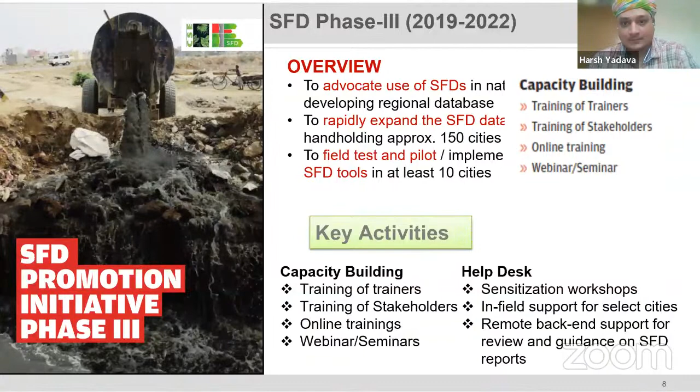How it has helped us, let me explain. When we made an SFD of Delhi, it helped us understand that 30% of the city is dependent on on-site sanitation systems. The report helped enlighten the National Green Tribunal Committee (NGT) to form a committee on pollution of River Yamuna. The findings of SFD 2016 helped register more than 300 private desludgers and initiate the practice of co-treatment—treating fecal sludge and septage along with municipal sewage in STPs—and the free installation of septic tanks.

A few learnings I want to share: when we were developing SFDs, we practiced and tested them in the field, brought back feedback, and used that to help improve it as a tool.

We understood that in India there is a lot of non-availability of data. Data is not current, it's outdated, and limited in form. There are areas where sewer lines are present but STPs are not, or STPs are present but household connections aren't there, or the STP exists but all wastewater is coming through open drains or tapping of open drains.

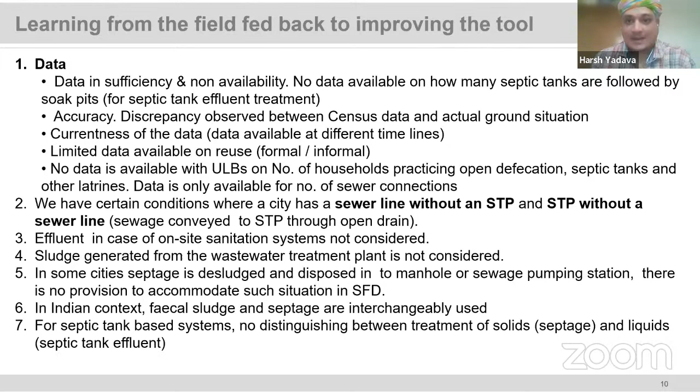Effluent from septic tanks is never measured. Reuse of sludge and data on what happens to fecal sludge was not available. In the Indian context, fecal sludge and septage were used interchangeably, so the precise meaning of these terms was not clear. These were findings from the ground when we field-tested SFDs, and we gave feedback to the SFD group which helped improve the tool further.

That was one part where we applied SFD as a tool to bring information from the ground. The other part is how we applied SFD for advocacy. For example, in Delhi, when we made the SFD it showed 56% safely managed, but we also made SFDs of smaller areas—lower income settlements, slum areas like the JJ resettlement colonies popularly known as Savda and Ayanagar. These are isolated areas in Delhi. Comparing Delhi's SFD to these areas, we can see the difference and how there has been inequality in services.

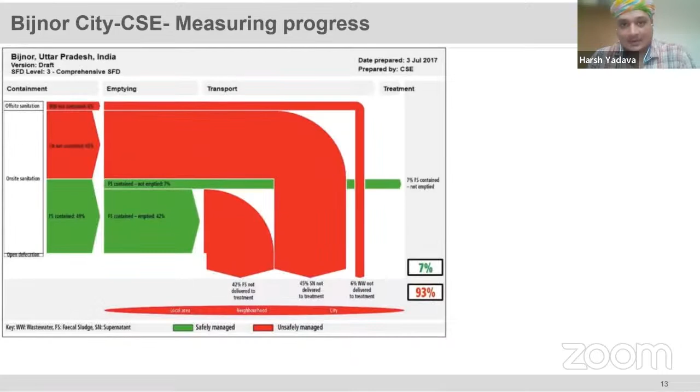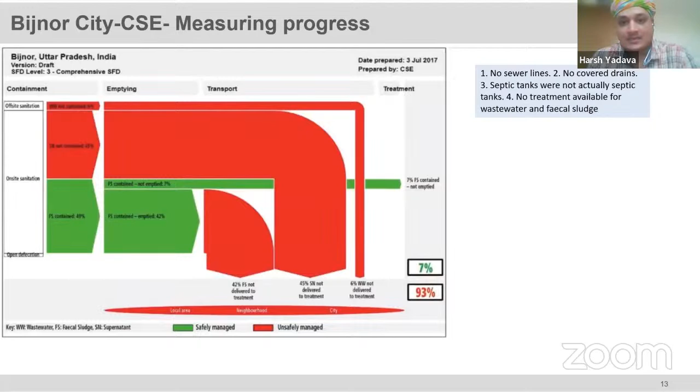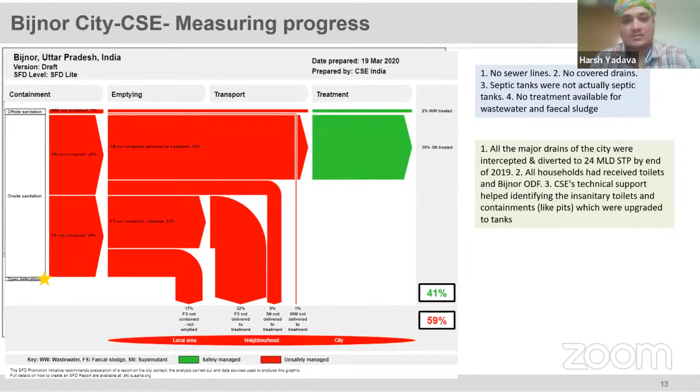We also used SFD in measuring progress. For example, in Bijnor, when there were no sewer lines or septic tanks, the city was only able to manage 7% of excreta and wastewater safely. When sewer lines were introduced, we saw some change. Then when the co-treatment practice was implemented in the city, we saw even more change.

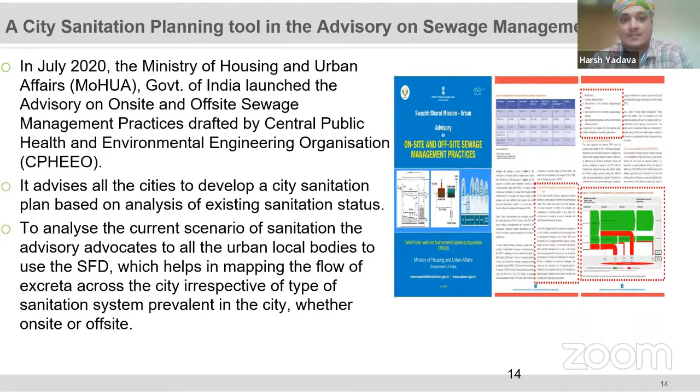A great achievement for CSE as a partner in SFD is that we were able to push this agenda into the manual—the advisory on on-site and off-site sewage management practices—drafted by the Central Public Health and Environmental Engineering Organization in 2020.

Before we move to further presentations, I'd like participants to ponder on a few things. SFD will not tell you the technologies, nor will it tell you the cost the town would incur, but it will always help you prioritize where to focus. Just making an SFD is not enough—it should be followed by plans and interventions for maximum utilization as a tool. How can it be combined with other tools like CSDA and energy assessment tools? And when making an SFD, what is your purpose—do you want to understand a change in the sanitation scenario, the effectiveness of sanitation service delivery, or to determine priorities? This should be clear before making an SFD.

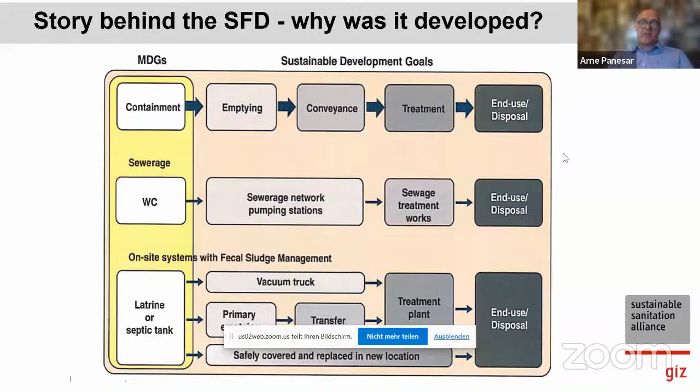I was thinking this is really a great tool. Together with a group, we started to say, can we promote that, and really make it not just an idea but a proper tool that can be used across the globe? We said yeah, let's do that. The inventors and the group said we'll do it with whatever we can. Then the Gates Foundation approached us and offered to be part of that journey.

Yeah, and so since then we're going on. What were the tasks to create a uniform, reliable way to look at sanitation that can be done in a similar way across the globe, to bring this methodology into one place?

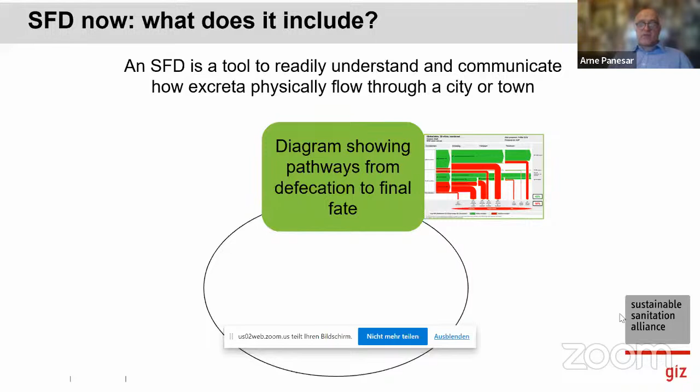But it's not only the diagram, it's also the narrative report on service and outcomes, which has to be there. For example, there might be a large city that received donor funds or its own net investment and built a huge central treatment plant, but they did not have the capacity to run it or replace broken parts, so it was not going — failing to function soon. That should be in the narrative report: first you have to have the capacity to run such systems, or the enabling environment, so you don't just look at the diagram and think, let's just build something and all problems are gone.

So the narrative report has to look into the context — what is the existing enabling environment — and help you not to take too fast and too simple conclusions from the diagram.

Then we're in an area where often there's no data, because if we look into informal settlements, if something isn't even planned or allowed to be there, how can you have data on it? So we said where we don't have data, we'll have informed interviews and do estimates, but be very transparent on how we came to the data we present. A complete record of all data sources is the third element of an SFD. With this, we could go into areas where others never have been, because they said, oh, we don't have data. We said no, for the initial picture we can get enough understanding of the situation and put it into a picture that is easy to understand.

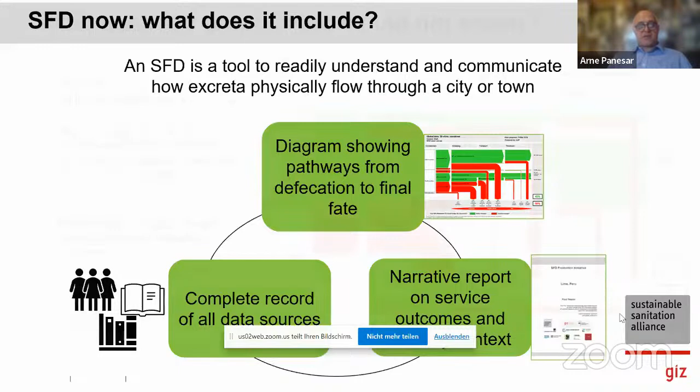So here we say SFDs are based on credible data, but not always on accurate data.

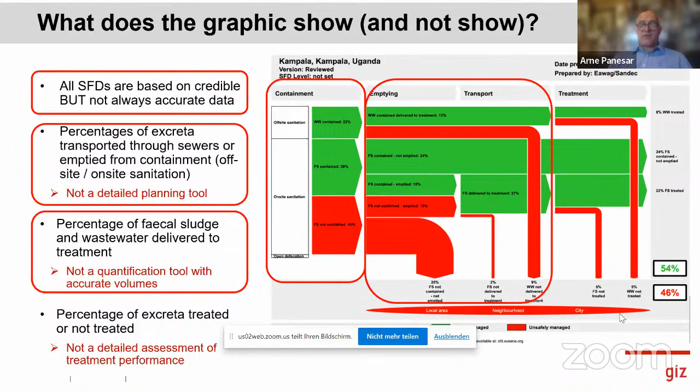It's starting with containment. As Harsh already said, it's the percentage of excreta - it's not a detailed planning tool. It's going along the chain: it's the percentage of fecal sludge and wastewater delivered to treatment, and it's not a quantified tool. It's not looking into volumes, but into the percentage of excreta and where it lands up, and it's as well looking into the percentage treated or not treated. It's not a detailed assessment of treatment performance. So it's doing some of the things and not all of the things, but it's a wonderful starting point.

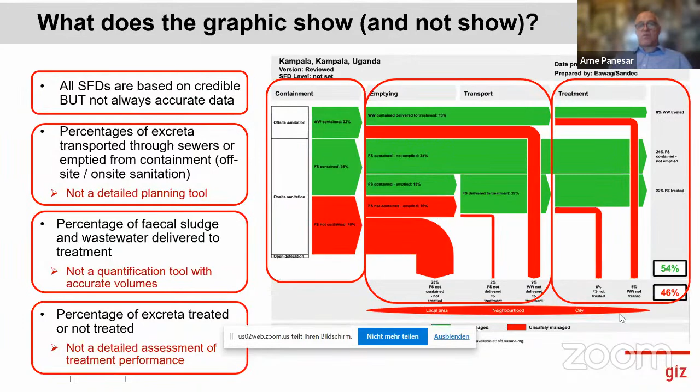As such, it helped bring the topic into discussion, not only in Delhi, as Harsh pointed out, but as well in Kenya. It came into the newspaper. You were wonderful as well at CSE to put it into the Down to Earth journal when Bill Gates was meeting the Prime Minister - he actually spent half an hour on an SFD that was produced from the initiative, and it helped enlarge the focus of the Swachh Bharat campaign, not only on containment, on the toilet, but looking into the full picture.

And we had then this plus and plus plus, which as well brought more sustainability into the whole campaign. Now it's one of the better used reference tools in the sector. We have at the moment around 250 cities covered, with about 180 million people, and it's presented not only by us but by different actors who find it good to explain their situation and what they want to do in presentations and so on. So it's actually contributing to the sector and to progress around that.

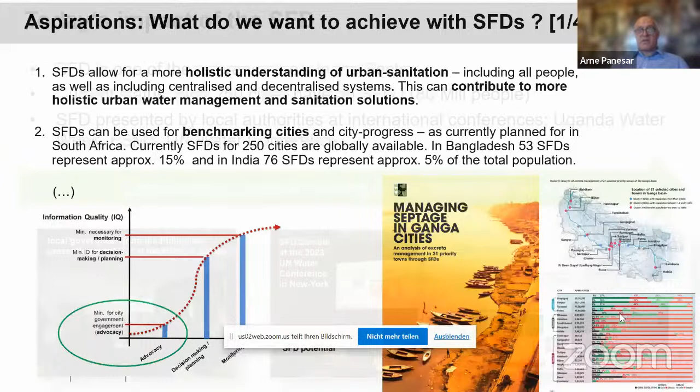An example is again the publication from CSE. So SFDs allow us for a more holistic understanding of urban sanitation, including all people, as well as centralized and decentralized systems. This can contribute to more holistic urban water management and sanitation solutions. And with that, it can as well be used for an initial benchmarking, e.g. between cities, like they're planning to do in South Africa, or in other countries, if you have a high number of SFDs, this process will sort of start on its own.

That's something else we've done on the website - we've provided a dashboard where with a few clicks, these are data from, I think, last week when I looked into them. You can have a comparison of all 53 SFDs from Bangladesh, for example, which already represent 24 million from roughly 160 million people - that's going towards 15% of the whole population, and even more of the urban population. Again, you can depict them as a multi-city diagram and get an idea where we're standing, and whether we have some progress.

Similarly, there are 76 cities from India in the database, representing just around 70 million people - that's 5% of the total population of India. But it's India, so it's a large population, and again it gives you some hints on the broader picture.

And like this, SFDs can be used to visualize and communicate progress. That can be done on a country level. Here we have an example from Zambia - similar to Delhi, they've looked into the whole city, but they've also looked into project areas.

What they've done is say, okay, we are planning for an investment - what will be the outcome of the investment? And if we invest it like this, what will be the outcome? And if we invest it in another way, what will be the different outcome? The SFD is a very convenient tool to show that in a very easy to understand way, so you can design scenarios and plan for your investment.

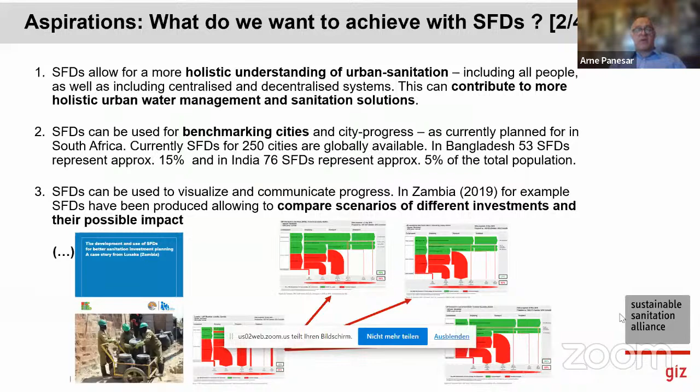Actually, in the beginning we said the effort to do an SFD typically should be made if there's a city where an investment is coming, and where you want to make sure that investment is reaching the unserved, and not just improving the situation for those who already are in a slightly better position.

Recently, we had a publication from Kampala where greenhouse gas emissions and sanitation were brought together, and the SFD was used to visualize where greenhouse gas emissions are actually happening. Yes, they're happening in the treatment plant, because you have to pump and bring in oxygen and so on, but mainly they're happening in septic tanks, where the organic matter is transformed into greenhouse gases.

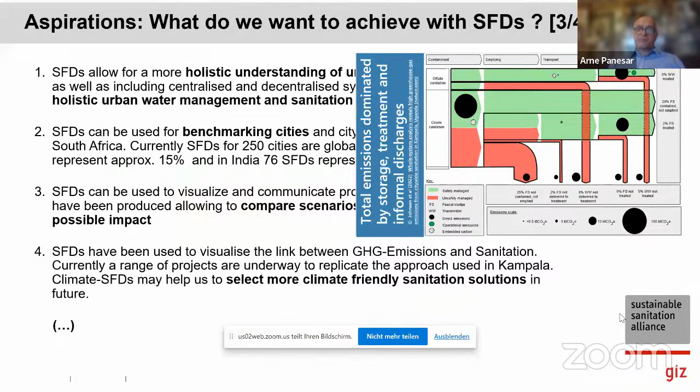The solution would be more scheduled emptying of septic tanks so that you can bring the material to a treatment plant and then use the biogas or do something else with it. So that's an ongoing discussion, and we need more publications because that's just a very initial one. Some are financed again by the foundation, and I'm curious what we learn from them and how this will lead.

We as well had a similar point from Harsh already. I'm pointing at the sanitation journey where we have collected a range of tools and concepts. SFD is one of them. It gives you the baseline information. If you want to understand the key issues, why actually is the situation as it is, we have the city service delivery assessment, and all that can be the foundation to then create good city sanitation plans. WHO has sort of done sanitation safety planning that as well builds on an SFD, and like this you can have a more complete picture of sanitation.

But I want to underline that in India we actually already have a very good urban sanitation strategy program and mechanism, and you have to think twice where to add additional efforts to visualize things or to have better information. And last not least, SFDs always put a focus on those remaining with unsafe managed sanitation, and thereby they help focusing on those people, and they help us to leave no one behind. And I think that's a key aim that we have when we work in the area of sanitation.

Good morning or afternoon, everyone, and thank you, CSE, for the invitation. My name is Alexandra Dubois, and I work for GIZ as well as SuSanA, the Sustainable Sanitation Alliance. Today I will be presenting about the potential application of SFD.

For that, I will use concrete examples that I have selected from the GIZ project portfolio. My presentation is actually going to echo more or less the presentation of Harsh and Arne, in the sense that I'm going to go a little bit deeper into the topic of usage of SFD.

I've compiled here in this slide a list of potential applications for the SFD. Among others, SFD can be used as an awareness raising tool. It can be used also for advocacy, coordinated dialogue, urban planning decisions, informing investment, monitoring, and last but not least, sector policies.

This is the structure of my presentation. I'll start with some background information on the relationship between GIZ and the SFD tool. I will then continue with 4 examples from GIZ projects which have recently used SFD: one in Costa Rica, one in Benin, one in northern Iraq, and one in Zambia.

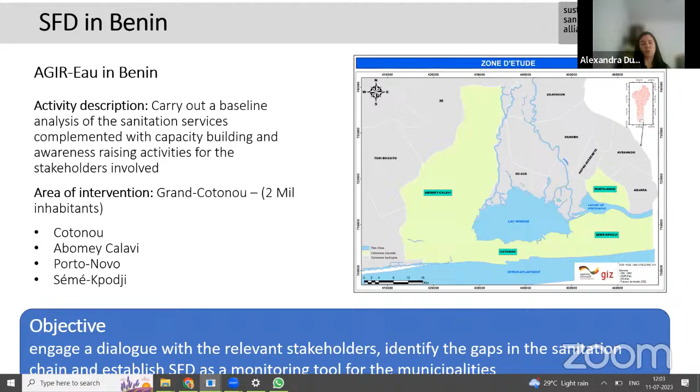The objective for the project was, on one side, to engage a dialogue on the sanitation situation in Cotonou with various stakeholders, but also to identify appropriate measures and eventually use the SFD as a monitoring tool for the 4 municipalities.

One particularity of Cotonou, and of the whole country, is that the entire population, 100%, relies on on-site sanitation. That's quite extreme, but it's actually the case for many countries in West Africa where there is absolutely no sewer line, not a single kilometer of sewerage. So an SFD assessment is of particular relevance in the sub-region.

But the translation of the SFD tool and template report in French was a precondition for its dissemination. So here we are again, the need for translating the tools into various languages.

Another realization which came from the SFD exercise, the data collection and the analysis process, was that it was particularly difficult to identify the source of the fecal sludge arriving at the fecal sludge treatment plant.

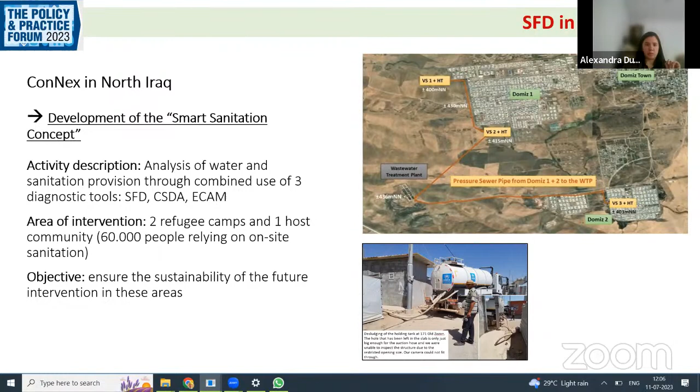The whole concept consists of a holistic assessment of water and sanitation services. For that, they're using a combined approach of 3 diagnostic tools: the SFD, the CSDA, and the ECAM tool. The SFD and CSDA have already been mentioned previously in the presentations of Arne and Harsh, and I'll come to the ECAM tool in a minute.

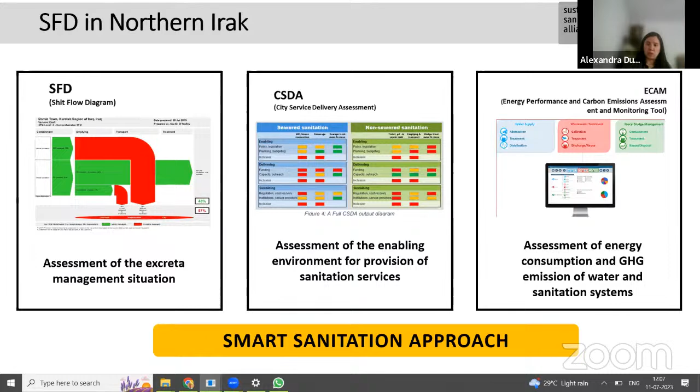So yes, combined assessment through 3 different diagnostic tools, each considering a different aspect. The SFD, as we know, is all about safe management of excreta. The CSDA, or City Service Delivery Assessment, is sort of the little brother of SFD, considering the enabling environment for the provision of sanitation services. And finally, the ECAM tool, developed by GIZ, evaluates the energy consumption and greenhouse gas emissions of water and sanitation services.

In this slide, below the SFD graph, you can see the visual result of a CSDA in scorecard format, with green being the highest score and red the lowest. This combined analysis of SFD and CSDA allows for a more qualitative assessment; aspects such as regulation, policy, and capacity can be added to the SFD assessment, enabling a more accurate understanding of the sanitation situation and a better search for appropriate solutions.

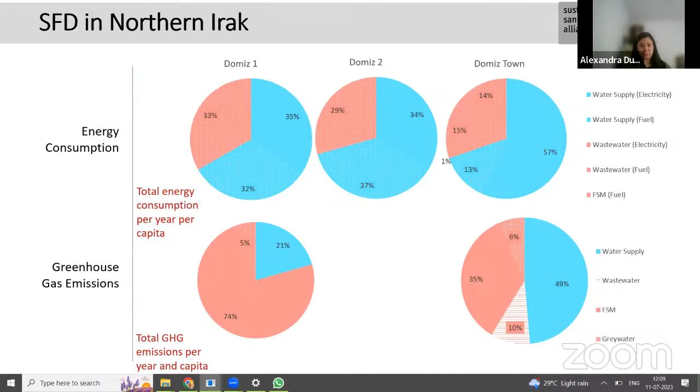The smart sanitation assessment was basically looking at all those three assessments and came up with conclusions - both technical and institutional measures that would benefit both the environment and the involved communities. They suggested some long-term and short-term measures, which would aim not only to improve the rate of safely managed sanitation, but also reduce the energy consumption and greenhouse gas emission from water and sanitation systems. I'm not going into details on that - we can now look at the next case study, which is quite similar.

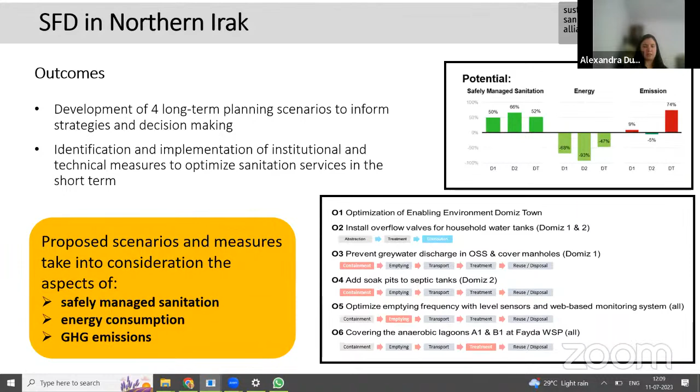This is the case study of Zambia, where the bilateral water and sanitation program conducted the so-called carbon monitoring assessments. They did this assessment in 6 different water utilities, 6 out of 11 in the country. Similarly to Northern Iraq, they used a combination of SFD and ECAM assessment. The main objective of this double assessment was to support the water utilities in defining adequate measures to improve their operational efficiency, but also reduce their greenhouse gas emission.

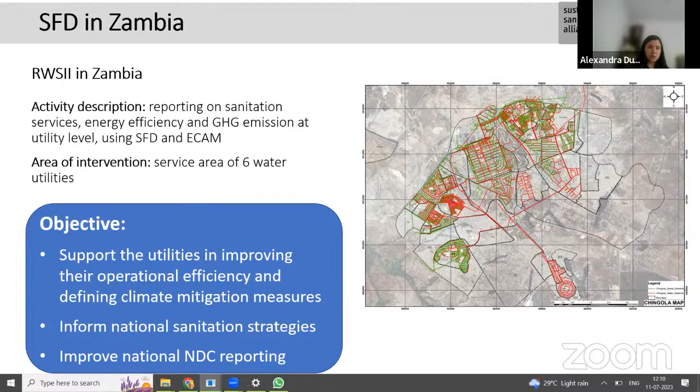Sorry, just - I didn't get that. Should I conclude now? No, I'm just saying please speed up. Okay.

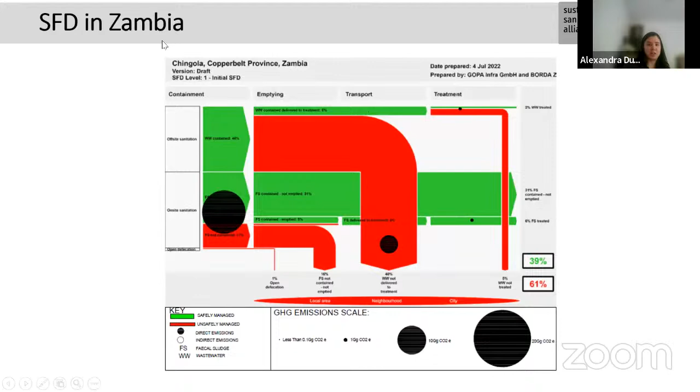This superposition of the SFD and the ECAM assessment is quite new and innovative, and we can predict it's going to be a very powerful advocacy tool, as it really highlights that in contexts such as Zambia, rather than focusing our effort and investment on optimizing wastewater treatment systems - which is what tends to be done in urban sanitation planning - climate change mitigation measures need to address the problem of long and inadequate retention of fecal sludge in pit latrines and septic tanks, and unsafe disposal of wastewater. Even to a non-sanitation expert, it's very clear that the focus must be on on-site sanitation and fecal sludge management rather than sewage and conventional treatment plants. That's sort of this new thing.

We probably have enough examples for today, but I'll just mention two projects, and the second was already mentioned by Arne, so I'll go quickly. First is the RUAS project in Uganda, one of the first projects in GIZ, but also outside GIZ, that implemented SFD. The assessment was conducted in Kampala and 6 other towns as part of the town planning process. The second example is the CFS Lusaka project, which Arne described, with the 3 scenarios, the 3 projected SFDs that helped inform a very large joint investment by several development banks - KfW, World Bank. It was quite a major project informed through SFDs - that was also quite unique.

That's it from my side. Thank you very much for your attention, and sorry if I went a little bit over time.

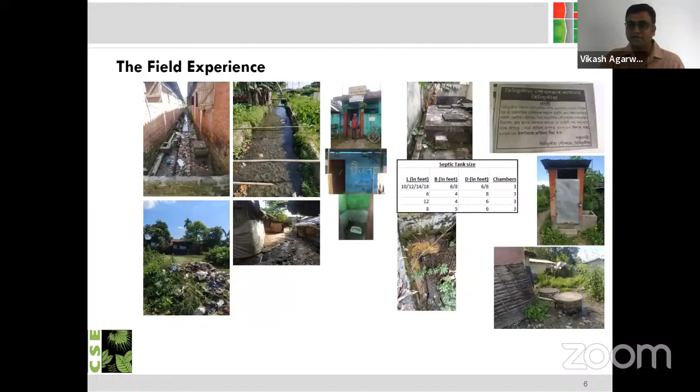When you go into the field, you see the various aspects of how things look in real life, like the actual size of the septic tank, versus what's on paper where we may claim to be ODF free. Is that really being practiced in the slums or unauthorized slums?

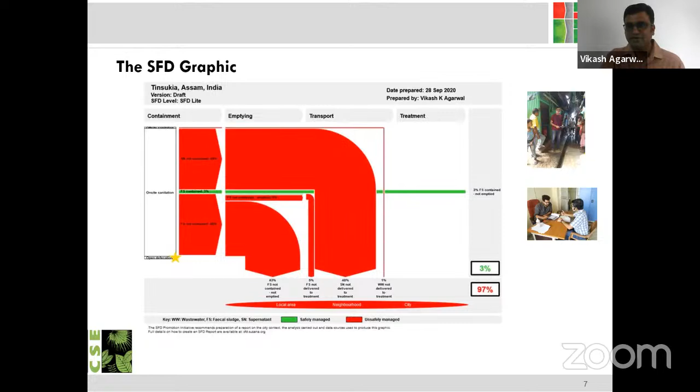The impact we could see from the SFD study: the publication of this report coincided with the Assam government introducing cesspool vehicles in various ULBs. We also published a blog on Down to Earth to create awareness among the masses on the sanitation scenario in Assam. A local web channel in Tinsukia, Assam First, published a 4-series program called Swachhta Ki Aur Ek Kadam to generate awareness based on the findings of the SFD study.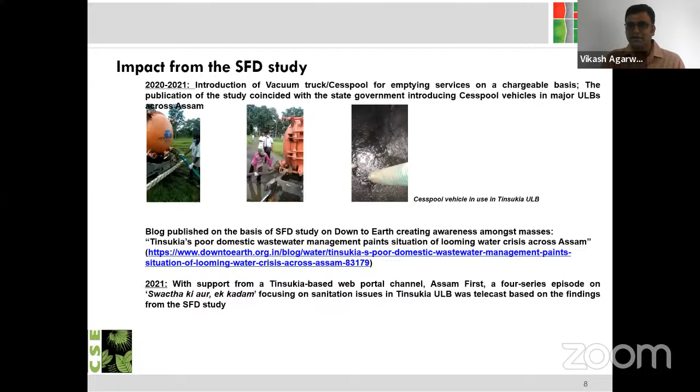Going forward, we are doing SFD for Guwahati, Goalpara, and a few other cities in Assam that will be taken up in 2023. One reason is the Assam government has floated tenders for setting up FSTPs, so we want a good amount of baseline data developed with the help of CSE. We also have support from UNICEF for this project.

So this is it, thank you so much. I hope this presentation is useful to people who intend to start doing SFD, giving them a basic understanding of how to go about it. Thank you so much.

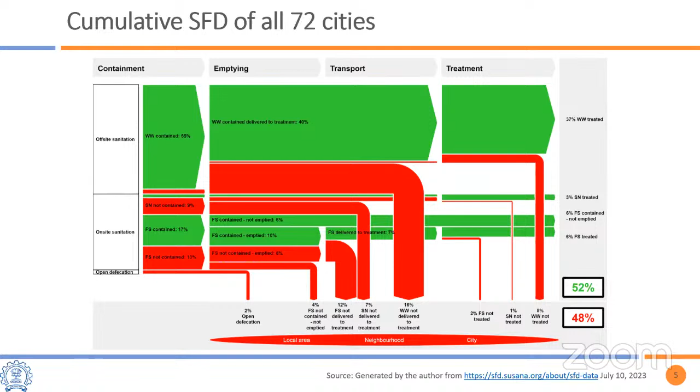But importantly, there is open defecation still practiced in cities. And many of these reports have been prepared after 2019, when the country was declared open defecation free. So we need to point that out to policymakers so that these decisions or these findings lead to better access to sanitation.

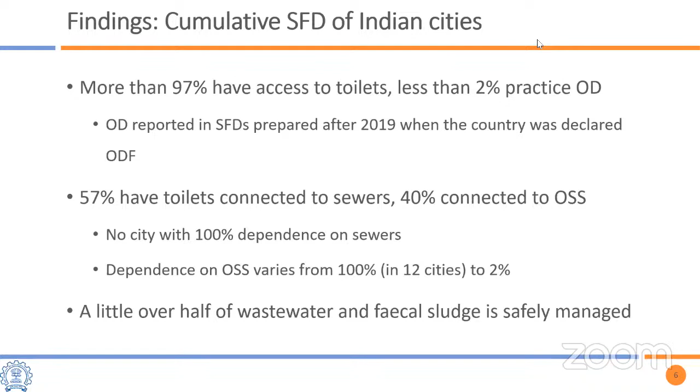Again, as a lot of on-site systems are septic tanks, they produce supernatant. However, in the SFD, I don't think that is adequately captured. Importantly, its management needs urgent attention, and for a person who's engaging in preparing a shit flow diagram, I think that's an important opportunity - we also need to be aware that management of supernatant is kind of hidden in the shit flow diagram, but you need to, as a professional, point that out to policymakers.

Cities report use of on-site systems that are not very safe. Pits in very high groundwater table areas, which kind of allow passage of water in and out, are unsafe. Emptying cycle - the Indian norm is emptying once every 2 or 3 years. However, even in the reports that we have on the portal, cities have assumed as much as 10 years, assuming it to be safe. So that's another area of concern.

In cities, both private and public sector are involved in service provision, and of course the quality and the charges vary. Importantly, manual emptying has been reported in many reports. Unfortunately, it cannot be quantified in terms of the dependence on manual emptying, because as you may know, it is illegal. But cities are aware that manual emptying is practiced, and it needs to be taken care of. Where treated, reuse of fecal sludge is not reported, and unsafe use of fecal sludge is also reported.

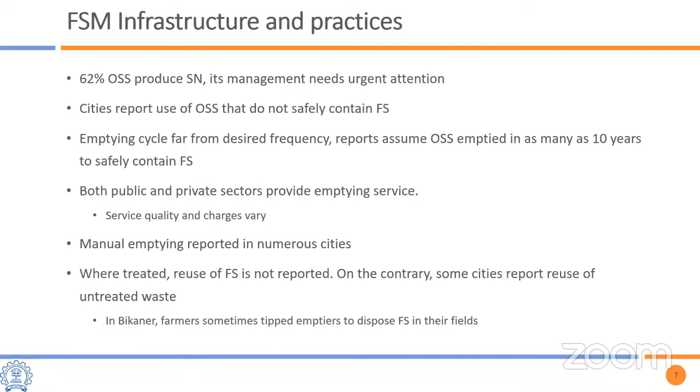Sources of information, as Vikash rightly pointed out, data is a big challenge. We have census data which gives information for on-site systems, but that may be inaccurate, and you may need to do ground truthing, especially if dealing with SFDs of higher levels. If you want a comprehensive SFD, you need to ensure the information you're using is of good quality.

Information related to management of supernatant is generally not available, pointing to a need for household surveys, which I'll discuss later. Where private services are involved, emptying-related information is not foolproof, so you need to triangulate information from different sources.

Again, as I pointed out earlier, information related to on-site manual emptying is not reliable. Treatment-related information, where treatment facilities are available, is generally available. And quantity of reuse is generally not available.

An earlier review by proponents, users and developers of the SFD tool identified 5 failures that typically occur in the FSM or wastewater service chain, and all 5 are prevalent in India: wastewater from offsite systems or sewers not delivered to treatment, wastewater delivered but not treated, fecal sludge not contained at all and not emptied, fecal sludge and supernatant emptied but not delivered to treatment, and delivered but not treated. However, there's an important failure in the Indian context not currently well captured - it's in the diagram but not adequately highlighted - which is wastewater not contained at all.

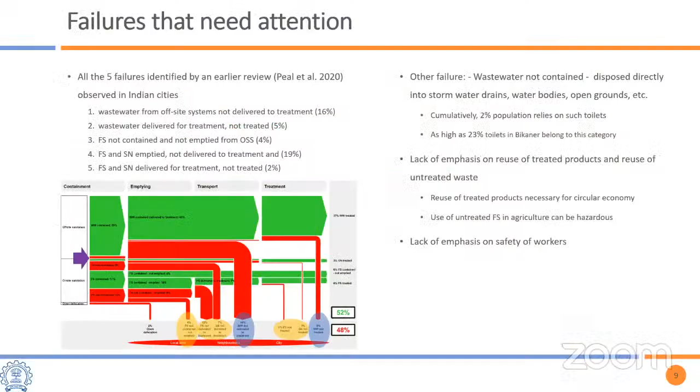A couple of other points related to SFD, but I'm not going to emphasize that right now. Let's go ahead - an example of Alappuzha, next please.

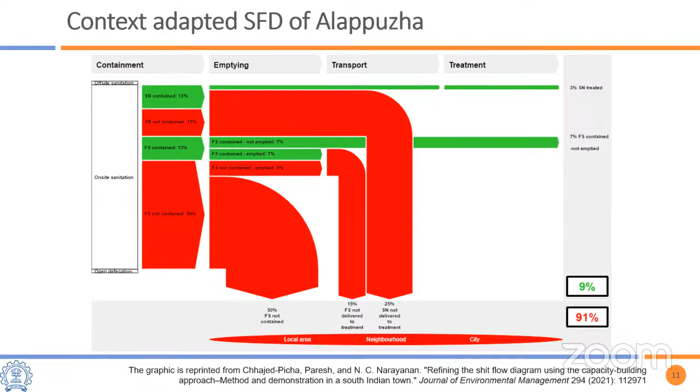We found that most of the fecal sludge is not treated, and what is shown as green is essentially safe containment largely. So lack of a treatment facility, as one can see, is the biggest bottleneck or challenge in the FSM service chain. But to get into details, next please.

There are also other limitations, as the analysis from the SFD points out - many of the on-site systems are not appropriate for the town, and therefore their replacement in the long term is necessary for groundwater to not get polluted, for public health safety, and so on.

As I pointed out, manual emptying is reported. At the same time, the mechanical emptying services available are not regulated, so as a planner or city government, we don't know what happens with fecal sludge once it's emptied. There's no treatment facility, agreed, but there are 3 plants in the vicinity, so there's an opportunity to co-treat fecal sludge in other plants until you have your own facility. We've not yet assessed reuse possibilities, but that's something we want to do in the future.

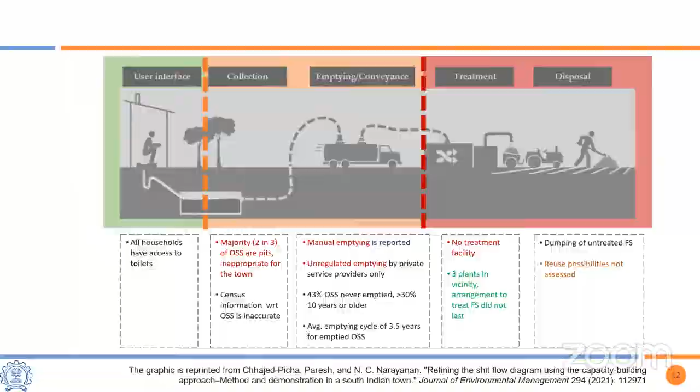My concluding slide: there's potential for using the tool for regional and global monitoring - by regional, I mean at the state and national level. There's potential to highlight inequities between cities and within cities. A lot of speakers spoke about lack of data, and that presents an opportunity to innovate.

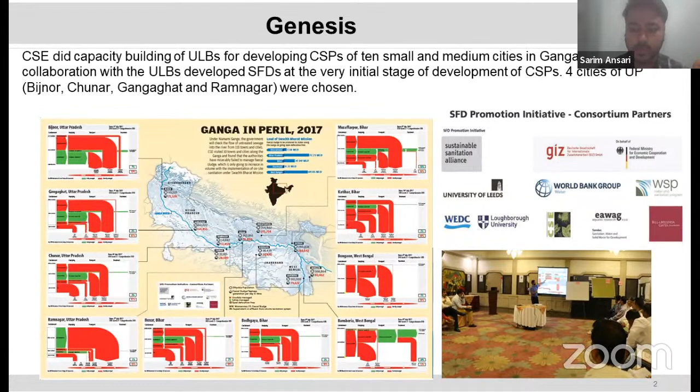I would say a catalyst to increase the footprint of CSE in UP was this MOU, which we signed with the Department of Urban Development in the year 2018. So essentially, this was revolving around fecal sludge and septage management, and I would tell you more about it in the coming slides. Essentially, the FSSM work in UP that CSE did and advocated for was largely intertwined with that of the SFD work.

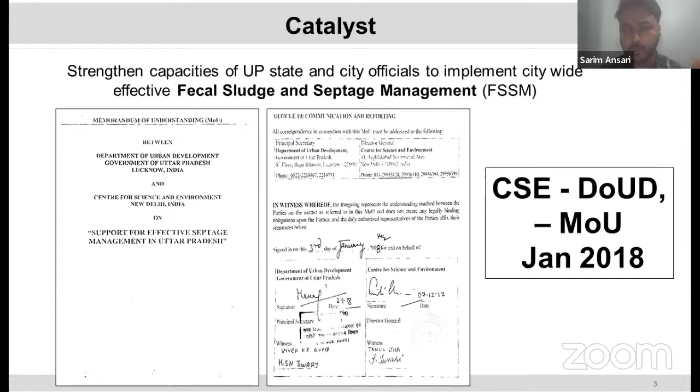So yes, moving on, I'll just give you a brief of what CSE did. The timeline is essentially an intertwining between SFD work, the FSSM initiatives which we did, and the related activities and outcomes. So in January 2018, we signed an MOU with the Department of Urban Development.

In February, we came up with the guidelines for fecal sludge and septage management. We did a few trainings, then we did a big event in UP where we launched part one of 66 cities.

SFDs which we made, and after that we did a few more FSSM related trainings. In February 2019, NMCG approved our DPRs or assessment report, based on which they funded our Chunar and Bijnor projects. Moving to 2019, in April the second part of our assessment report was launched for 66 cities.

I'll brief about the cities report outcomes at a later stage, just going through the timeline at the moment. So then again we did some SFD trainings, FSSM trainings, sometimes both. In August 2019 we came up with the co-treatment report, which was essentially done on this STP in Lucknow.

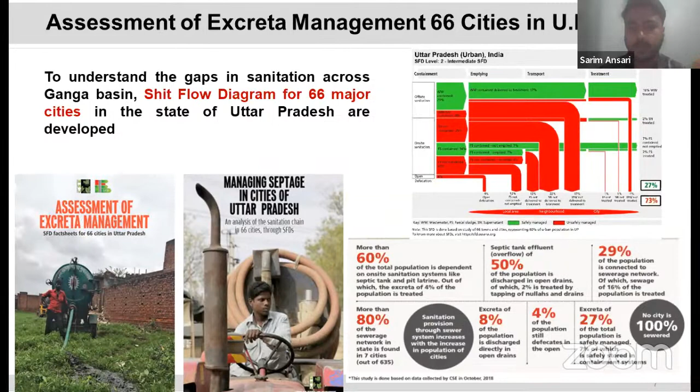Moving to the next event, this was an international event, named SFD Week, and the highlight of it was the work done in UP.

The part second of the 66 cities report was presented in this event. DG, NMCG, and the Secretary MoHUA launched it. This gave a platform for UP, and the UP sanitation scenario was highlighted in this event, which prompted state officials to take up FSSM initiatives, or at least talk about FSSM initiatives in UP.

This was followed up with another report we did on co-treatment in Bharwara, which I already mentioned. All this prompted the state officials to actively take up measures to tackle sanitation gaps, or largely FSSM, how to do FSSM. This prompted the state to go for FSSM plans, FSTPs, and co-treatment in 2019.

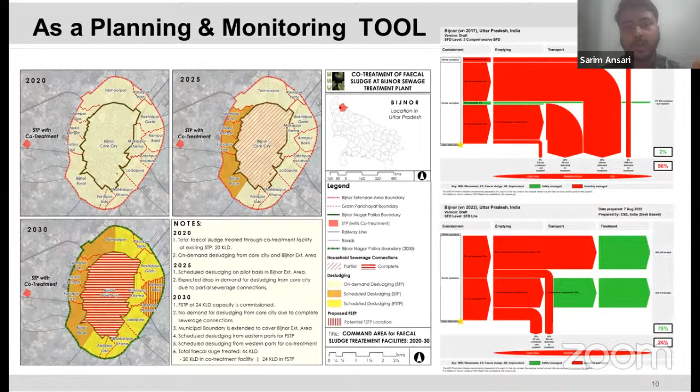What is being shown in the slide right now was a part of that report for Bijnor town. Apart from that, SFD was also used as a monitoring tool in UP. On your right, you can see two comparative SFDs, before and after - one from 2017 and another from 2022.

The change in sanitation scenario, we tried to monitor using SFDs. This change of sanitation scenario was actively communicated to the city sanitation committees, showing change over years. So this was also a tool for monitoring.

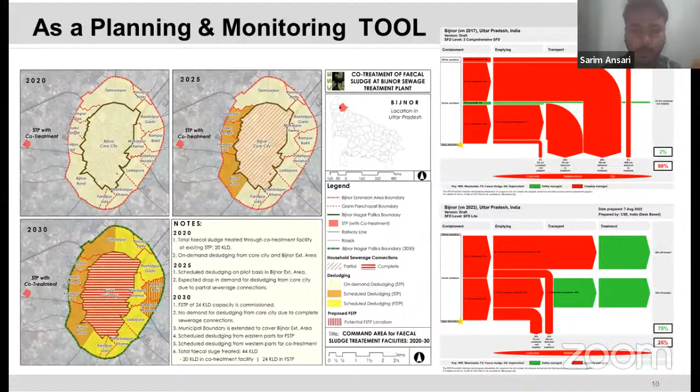As I already mentioned, it was also used to map inequities within cities. You can see that in Bijnor, the whole city's SFD shows safely managed excreta at 75%, but in a low income settlement area, Ravidas Nagar, the safely managed excreta is only 35%. So the SFD highlights the gap that exists within a city.

So what learnings or conclusions from our journey were that essentially our FSSM work in UP was through advocacy of SFDs in the initial part. This was also used for enlightening city officials about the sanitation status of the town during meetings. It was used as a monitoring tool to assess the sanitation situation before and after, for developing city sanitation plans of towns, as a baseline for pre-assessment feasibility studies of a town, and also as a baseline study for tools like the online tools CSE developed.